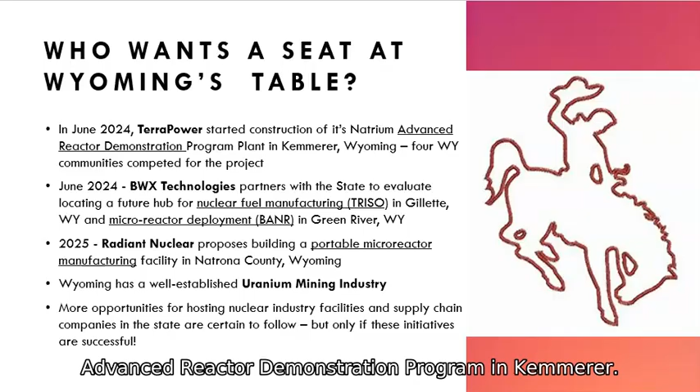But why do we have this conversation going on? Because the table is full of nuclear opportunities for the state of Wyoming. So I have a couple slides up front, just to set the stage, set the table. In 2024, TerraPower started construction of the Natrium Advanced Reactor Demonstration Program in Kemmerer. So we have a nuclear demonstration project happening now in Western Wyoming.

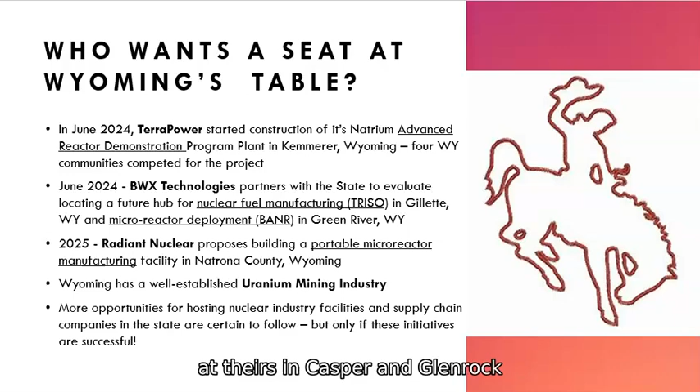Back in 2021, when that was announced, there were 4 communities competing for the opportunity to have TerraPower come to theirs, and Casper and Glenrock was one of those communities. We were competing for the opportunity to have that demonstration plant in our neighborhood because of the jobs and the economic growth.

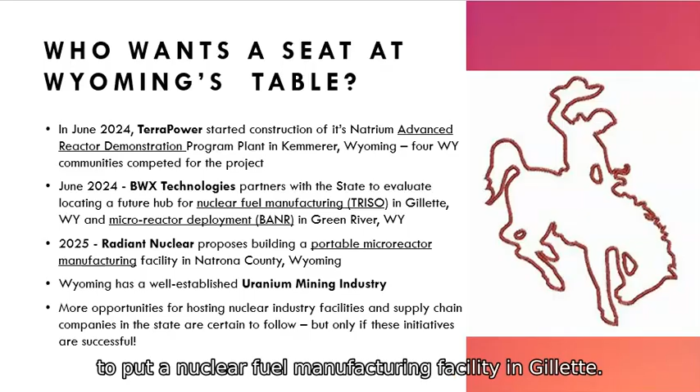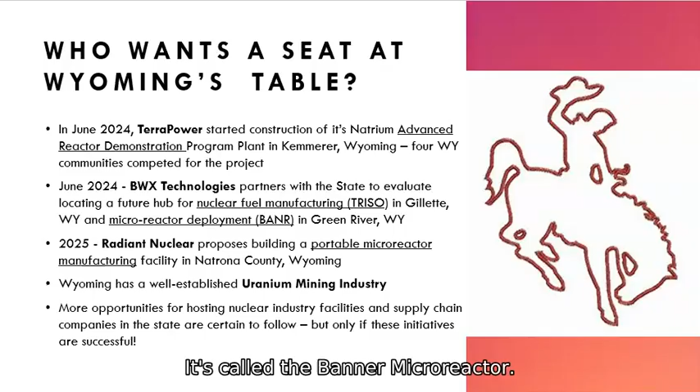I don't talk a lot about that in my presentation, but I know about it if you have questions. It's called the BANR micro reactor. It would produce about 50 megawatts of electricity, and they want to tie it in with one of the soda ash production facilities in Green River. I think that's really cool.

And in Wyoming already, we have Radiant Nuclear in our backyard talking about a portable micro reactor manufacturing facility. That's probably what has a lot of people interested. I'll disappoint because I'm not speaking directly about that throughout the presentation. I'm speaking indirectly about safety aspects of the nuclear industry. But if we want to have that dialogue, that may happen.

Already Wyoming, and the reason I'm here for the last 28 years, is that we have an established uranium mining industry, and it is growing. It is growing now, and the uranium mining industry is probably healthier than it's been in the entirety of the 28 years that I've spent in Casper. So if this goes well for the companies that are interested in coming here, we'll have more opportunities and more discussions about hosting nuclear fuel cycle type facilities in our neighborhood.

Why all the growth? Because nuclear power right now already produces about 20% of our nation's electricity. So 1 in 5 light bulbs, 1 in 5 homes is powered by nuclear in our nation, and it's been that way for many, many years, safely operating. The nuclear power generation is carbon free, and that's an attribute that I think many people are drawn to nuclear for. It's a carbon free source of electricity, and it has truly an incredible safety record in the United States.

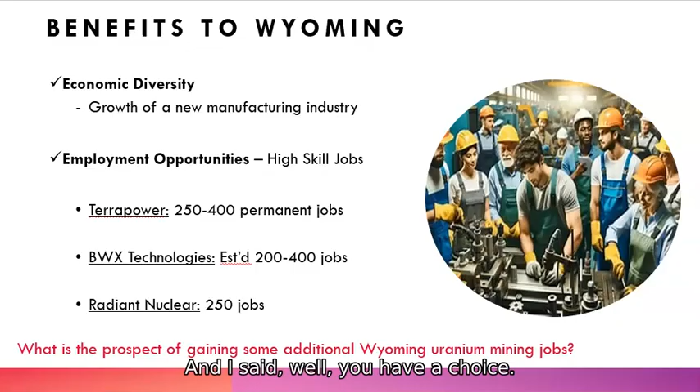All my friends, you heard I'm semi-retired, right? Which means I'll consult if you pay me enough. Otherwise, I'm content to sit on my duff and do things like this. All my friends are complaining about how hard they're working now, and I said, well, you have a choice, you could do what I did. Anyways, so it's a great time.

All that is just context. What I really wanted to do is condense some information about what I know and what I've learned in my career into something understandable. So this is the Nuclear 101 portion. Let's get some STEM education going here in this room tonight.

I want to address the questions: What is the nuclear fuel cycle? How does a nuclear power plant work? What is radiation, and how do we protect against it? And then what exactly is spent nuclear fuel, and is it safe to keep around and be around? Those are the topics I thought I'd spend a few minutes on.

Thank you for patiently sitting and listening, because I know if I speak for 30 minutes, that won't be hard for me to do, and if you ask questions, I won't be done in an hour. So we're going to try to hold questions to the end. If you have a notepad or a means of keeping your questions, we'll get to them, I promise. But this is a lot of topic, and I think we're moving along pretty well.

One slide on the nuclear fuel cycle, because really what we're talking about is attracting jobs across the nuclear fuel cycle. I've been in the state long enough.

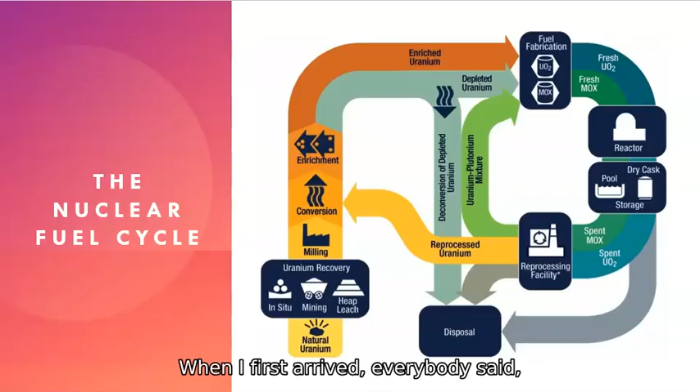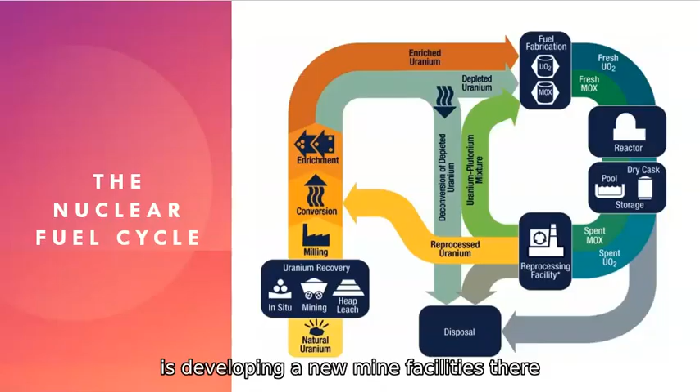When I first arrived, everybody said my mom, my dad, my grandpa, my brother worked in Shirley Basin. They said, Wayne, when are we going to get Shirley Basin back up and going, producing uranium? I'm pleased to tell you that the company that has that project now, UR Energy, is developing new mine facilities there, and they should be producing early in 2026 back in Shirley Basin for the first time in decades - at least 3 decades, because I've been here nearly 3 decades. I had a little hand in that along the way in acquiring that project and seeing it come.

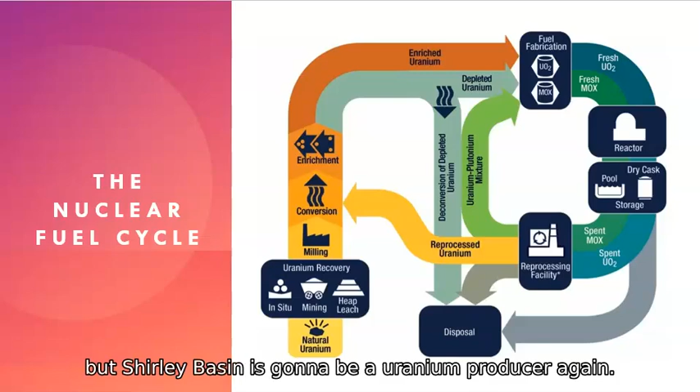But Shirley Basin is going to be a uranium producer again. This is part of the growth. It's exciting. But the nuclear fuel cycle starts with uranium mining, the production of uranium.

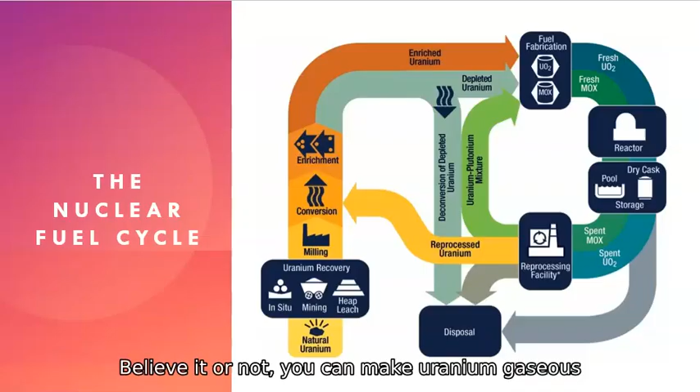Uranium is the fuel for nuclear reactors. Then we do something called conversion, which changes the uranium from a solid to a gas, a gaseous form. Believe it or not, you can make uranium gaseous as uranium hexafluoride. It's 1 uranium and 6 fluorides, and that's a gas. You can separate isotopes of uranium in a process called enrichment.

Isotopes are 2 uraniums, very similar, but with a different number of neutrons in the nucleus. So U-235 is fissionable. It's something we can split in a nuclear reactor, and U-238 is not.

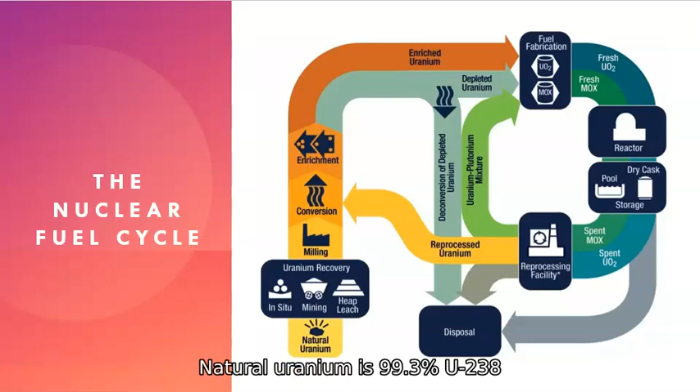Natural uranium is 99.3% U-238, which is not useful for a nuclear reactor. So 99% of what I mined in my life will go sit and be depleted, useless uranium. And the 0.7% is what we're after. We want to enrich that concentration of 0.7% for most of our reactors to 4 to 5%. And then for some of the newer reactors, we're talking about enriching up to 20%. Nuclear weapons, we enrich that isotope up to 90 to 95%. So the peaceful, commercial use of uranium doesn't have enrichment anything like what's needed for atomic weapons.

But the first 3 steps of the nuclear fuel cycle are preparing the fuel: mining, conversion and enrichment. Those are the things we're talking about. Then the enriched uranium is fabricated into fuel for the reactors. It's sent to the reactors, it's used.

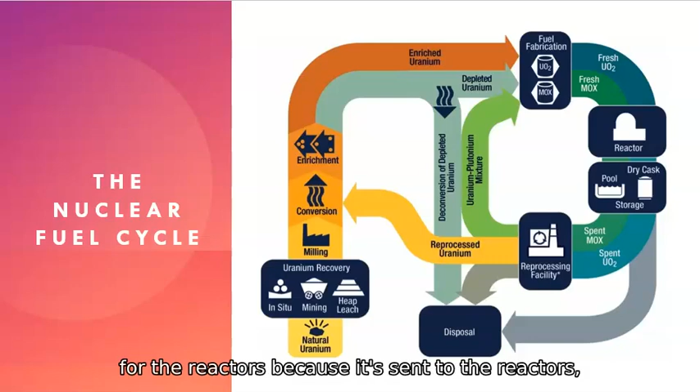Most nuclear fuel has a useful life of 18 months to 2 years when it's in the reactor. So a fuel rod, a pellet, something small, will sit in the reactor and be consumed for 18 months to 2 years before it's used up. Its potential energy has been consumed and converted into energy, and we get what we call a spent fuel rod.

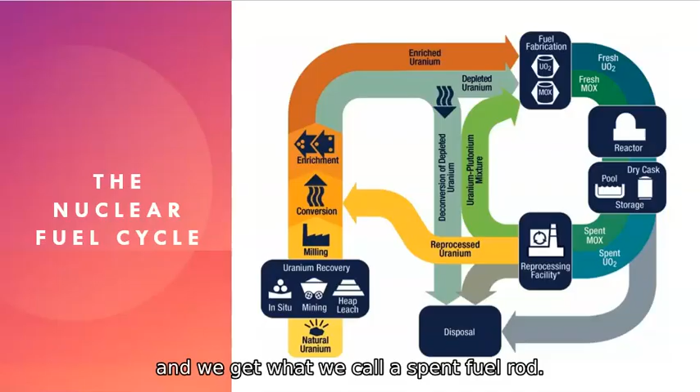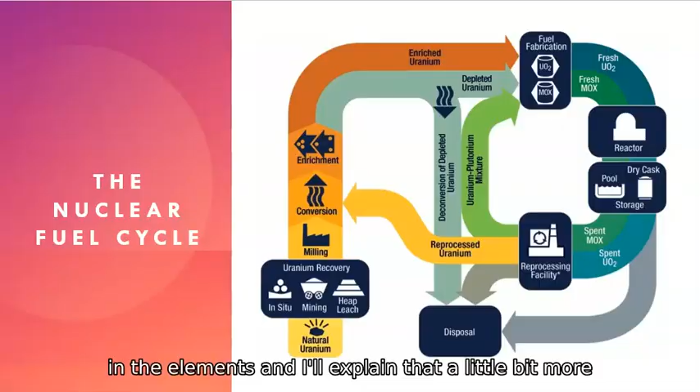Now those spent fuel rods are thermally hot and irradiated, which means they have extra neutrons in the elements - I'll explain that a bit more in the 'what is radiation' bit. But those spent fuels need to be cooled down.

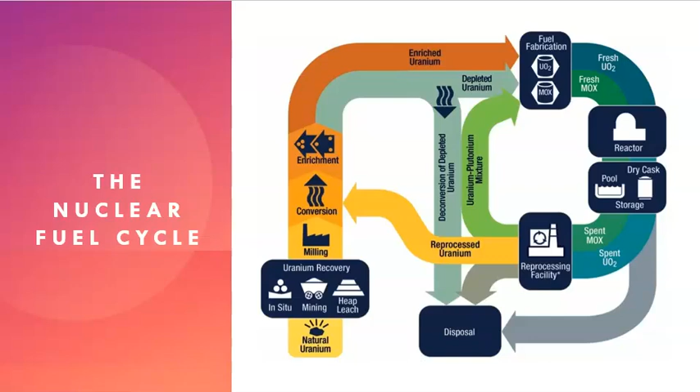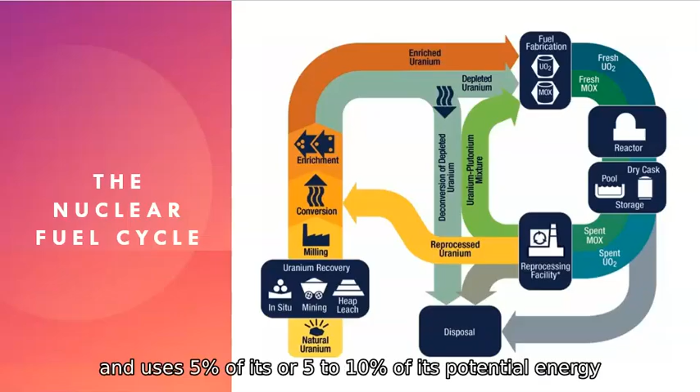And then some nations, France and others, allow those fuel rods to be reprocessed. Believe it or not, when a spent fuel rod is spent, 90% of the potential energy that could be used to do a nuclear reaction is still contained in the rod. So it runs for a year and a half or 2 years and uses only 5 to 10% of its potential energy.

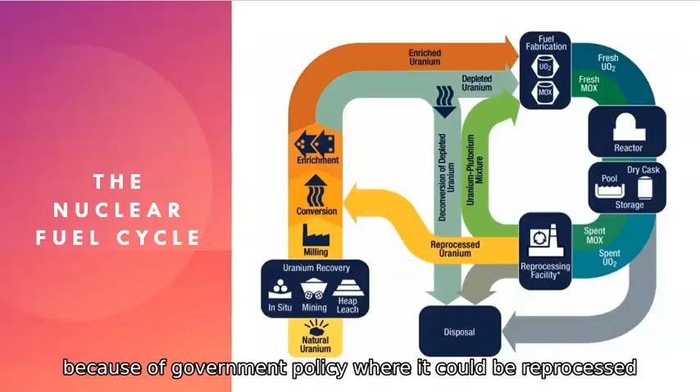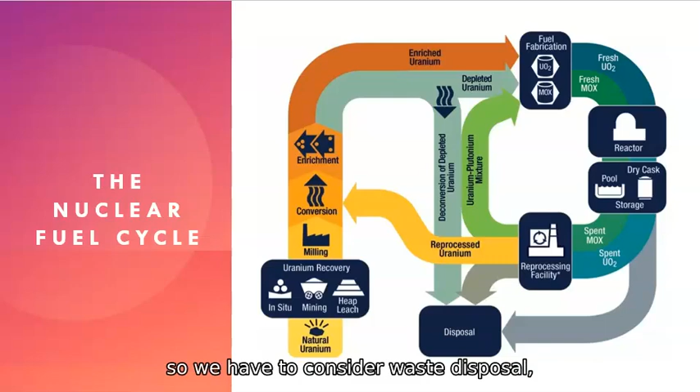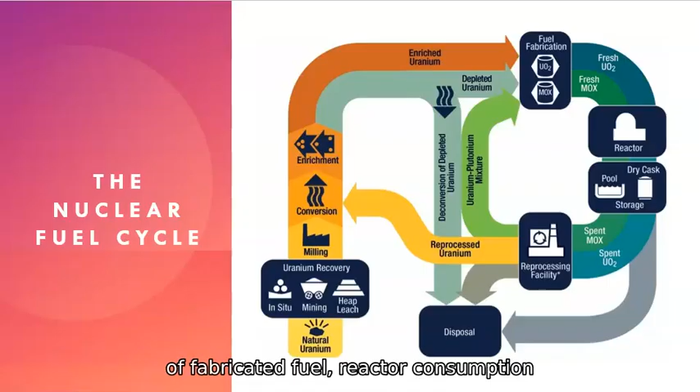And then that rod is waste in the United States because of government policy, where it could be reprocessed and we could use that 90%. Again, we could re-enrich, but we don't do that here. So we have to consider waste disposal, nuclear fuel disposal as part of the nuclear process. But all in all, this slide gives you the whole picture: fabricated fuel, reactor consumption, and then the option of either reprocessing or disposal of the spent fuel.

So how does a nuclear reactor work? What really makes this different than other forms of electricity generation? Really, in this case, it's the heat that's generated from the controlled fission, splitting of a uranium isotope 235. That heat produces steam. The steam turns a standard turbine electric generator. Steam turbines are used in wood, coal, natural gas, and diesel-fired electric power plants. No different - it's just the source of heat. We're not burning something, we're splitting an atom and getting heat from splitting atoms.

So this shows you an atom of uranium 235 getting split. What happens is a neutron, a free neutron, which is a high energy particle, hits that atom. It adds one neutron into the nucleus of the uranium atom, and it becomes very unstable with an extra neutron in there. And it splits into a krypton and a barium atom, and it also throws off a lot of heat. And then it throws off 3 more neutrons. So 1 neutron goes in and 3 neutrons come out.

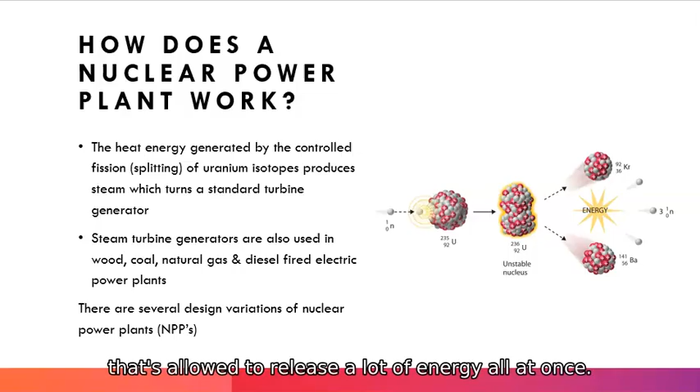So this is a boiling water reactor. This is the typical reactor that's been built in commercial power plants. A couple of things you want to know: water is used as a heat exchange media.

On the far left, the far left you see a containment building with a dome. The nuclear reactor's inside of that. Water is pumped into that reactor and takes on the heat. The water becomes steam, the steam goes out of the reactor building, turns a turbine, which generates electricity, and which goes to our cities and communities.

And then that water, that steam, is condensed and cooled again. There's a cooling tower, and it's returned back into the reactor. This was the original design of boiling water reactor. But the key feature is water is heated to steam, and steam exits the containment structure and turns a turbine to generate electricity. If you were burning coal, you would generate heat by burning coal, and that would heat water, which would make steam, which would turn a turbine, which would generate electricity.

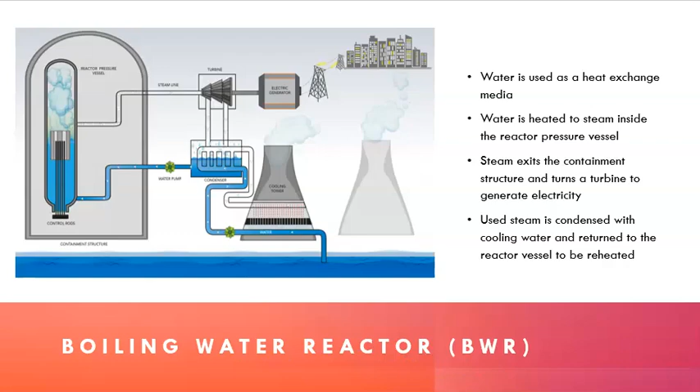Not much different, really. Let's boil it down to the nuts - they're not much different, except the source of the heat.

And this is my pet peeve, this is something that I just absolutely abhor. The image that you see here is not a nuclear power plant. For those of you who get this, these are cooling towers. These are structures that are used to cool steam, and they generate steam - that's water vapor being emitted, clean steam being emitted from a cooling tower. And the reason I said this, we always see these towers and we think nuclear - that ain't it. These cooling towers are common to many thermal electric generating facilities, not just nuclear. Every time I see a picture of a nuclear power plant and it's just a couple of these cooling towers, I say, oh come on, let's do some science, right?

So the next generation of nuclear power plant became safer, because what they did was they put a loop of superheated water and kept it inside the containment vessel. Because hot steam needs high pressure pipes, and you're transmitting through pipes, and a steam leak where the steam was in contact with the nuclear reaction could carry radionuclides out. So what they did, they got smarter.

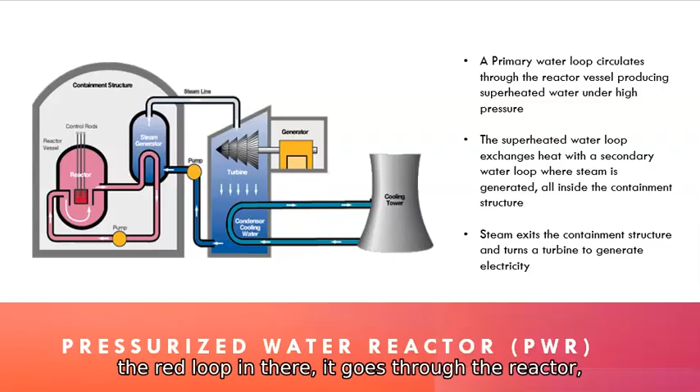They heated up the water into super high pressure hot water and kept it as water. They have a separate loop, the red loop, that goes through the reactor and gets heated up. And then they have a second heat exchanger, which generates steam. So in this case you have a water loop, a primary hot water loop, and then a steam loop. The steam loop gives you that steam that turns the generator, which generates electricity, and then you cool the steam and send cool water back in. But there's a level of separation between the nuclear reactor and the water that exits the reactor containment building, and that adds an additional safety feature to reactors.

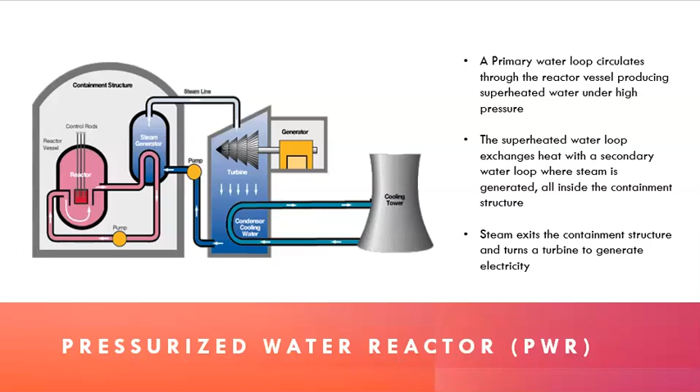Now we're talking about the TerraPower type of reactor. This is molten sodium, or sodium cooled. Rather than using water to cool, we use a hot metal - in this case molten sodium - replacing the water as our heat exchange media. The advantage is that molten sodium has the heat capacity to contain 6 times as much heat as steam. Steam just gets super energetic and wants to expand as fast as it can. You could put 6 times more heat into molten sodium than you can into hot water, so the heat capacity is incredible.

So they have a hot primary sodium loop that exchanges heat to a secondary sodium loop, and hot secondary sodium leaves the reactor containment vessel and goes to a heat exchanger, where that hot sodium heats up water, makes steam, turns a generator, makes electricity. Sounds familiar? This is getting repetitive, isn't it? But these are different models of nuclear reactors, and evidence that as we went through our learning curve with nuclear, we got safer and safer designs.

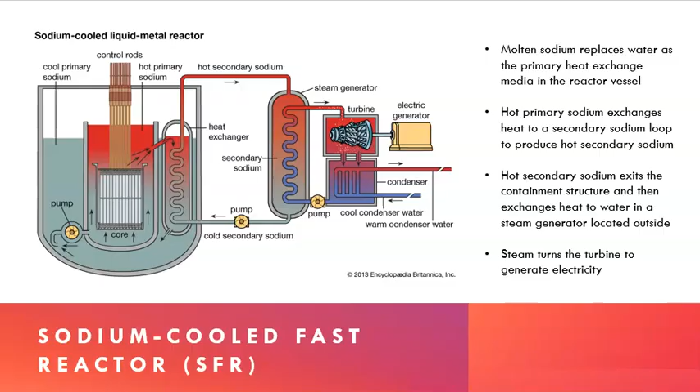They want to produce up to 345 megawatts in a small modular reactor design, also known as a sodium fast reactor. The neat thing is they can store heat in hot sodium tanks, so they don't have to go straight from generating heat in the nuclear reactor to turning turbines. They can store it and follow the demand. It's got load following.

So they have these hot sodium tanks which exchange heat to water, and the electric generation island is actually a separate building. It's not a nuclear facility at all. You're just getting hot steam going across to a turbine.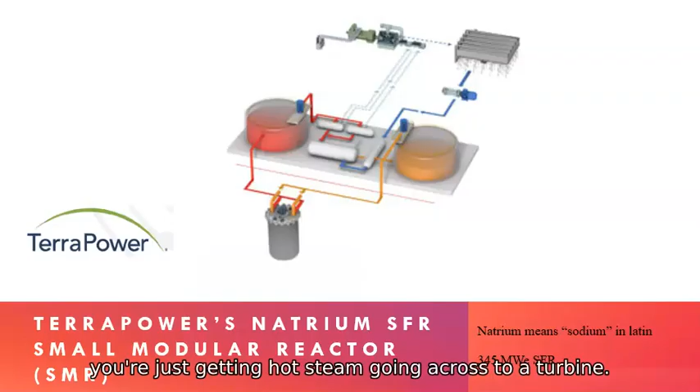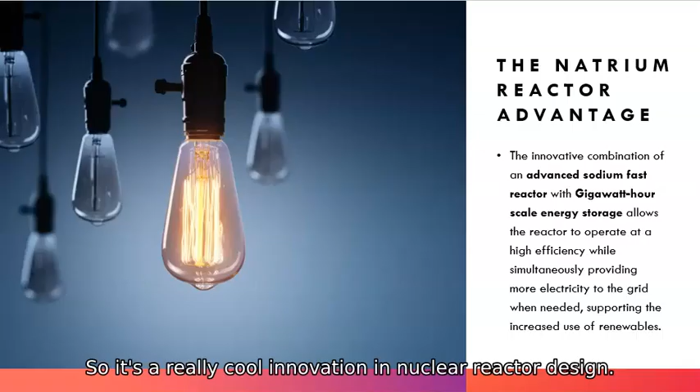And again, the advantage of this innovative design is you're going to get gigawatt-hour scale energy storage. You can store over a gigawatt of energy, which is about what Casper uses in a day. It operates at high efficiencies and can follow loads. It's a really cool innovation in nuclear reactor design.

And then there's Radiant. Radiant reactor, it's a microreactor. They want to produce 1 megawatt reactors, one. TerraPower is 345. The BANR reactor, which BWXT wants to do, is about 50. So there's all these different models, and a standard reactor is about 1,000 to 1,200 megawatts, 1,000 megawatts being a gigawatt.

Anyways, the fuel is tested and proven. It's called TRISO fuel, and that's actually what BWXT wants to manufacture in Gillette. They want to use the TRISO fuel for manufacture of the microreactor here. That's a ceramic coated particle. It actually has shielding inherent in the fuel pellet, and it's meltdown proof.

It's been proven that you cannot heat it up enough to melt it down. That's an innovation in and of itself, so it's an inherently safer design. Helium gas is used rather than sodium or water as the heat transfer.

And when you get this, you'll really get it. Helium cannot be irradiated. Irradiated means it takes on a neutron into its nucleus, and helium, being an extremely small atom or element, cannot take on another neutron in its nucleus. So if helium gas was released to the environment, it would be non-radioactive.

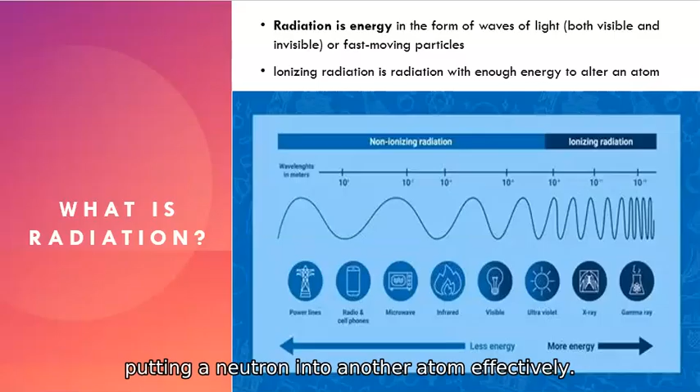And those are the ones you see across the top of this chart. If you can read it, you have non-ionizing radiation and ionizing radiation. What does that mean? Ionizing radiation is radiation that has enough energy to alter another atom, and that's the damage that can be done. So it's the X-rays and gamma rays we're concerned about for ionizing, putting a neutron into another atom effectively.

We are swimming in a sea of radiation every day, whether you know it or not. And that's one of the things that creates fear for radiation: we can't see it, we can't smell it, we can't sense it when we're being exposed to it. That's hard, that's a hard thing to overcome.

But I'm about to get on an airplane in the morning. I'm getting out of town. You know why? Because I'm here tonight, right?

And I took a chance.

Every time you get on an airplane, you're getting less shielding from the atmosphere, and you get a lot more cosmic radiation, radiation from the sun. That's natural. You also get radiation from the soil and dirt—there's a lot of radioactive elements in low concentrations in dirt. You get radiation from the food you eat, bananas and such. 9% of the radiation you take in a typical year is from food sources like bananas and irradiated milk, things we do to keep germs from killing us. We use radiation to do that, and it's very effective.

One of the big sources of radiation exposure is radon gas. Radon gas is short-lived, and when you're exposed to it and inhale it, it can decay in your lungs and do damage to your lung tissues. Another source is medical.

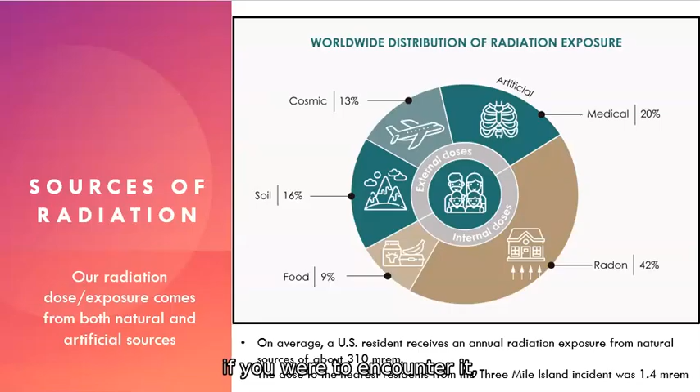So let's talk about the different types of radiation. You hear about alpha particles—that's a large, heavy particle with a little bit of energy. It's electrically charged, essentially a helium nucleus, with 4 neutrons and 2 protons, giving it a +2 electric charge. It can be completely blocked or shielded by a sheet of paper, your skin, your clothes—pretty much anything that alpha particle encounters will shield it from you.

The risk for alpha radiation is really inhalation. Radon gas, when it breaks down or decomposes in your lungs, gives you alpha radiation directly to your lung tissues, and prolonged exposure can cause damage.

Helium's mass—it has 2 protons, 2 electrons, and 4 neutrons. That would give it an atomic mass of 6. Yeah, I think that's what it is, or check the periodic table. I looked that up before I put it on the slide.

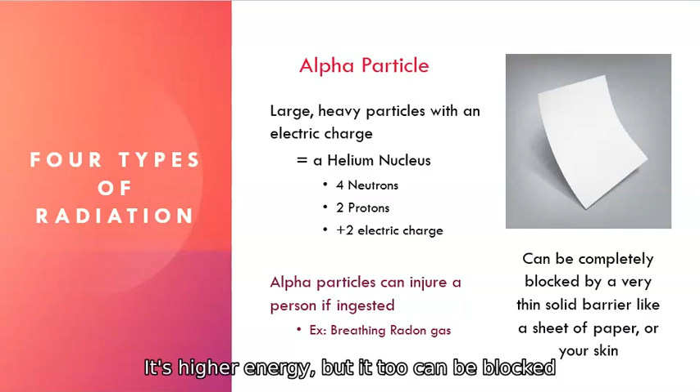A beta particle is faster, with a single electric charge. It's essentially 1 electron, higher energy, but it too can be blocked by simple shielding like a piece of aluminum foil or your clothing. Beta particles can also injure you if ingested, but are unlikely to do much injury if just exposed in nature.

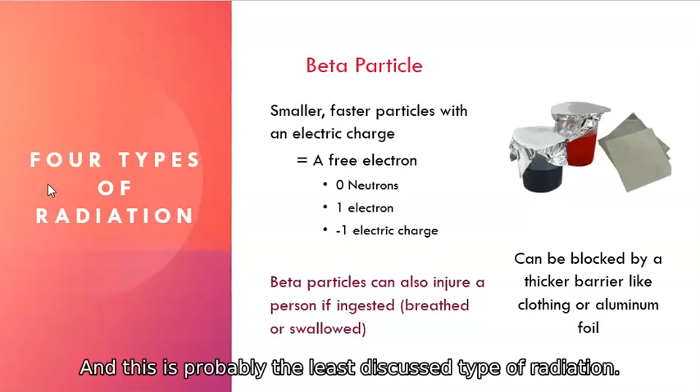This is probably the least discussed type of radiation. Next we're talking about wave-like rather than particle types of radiation. Gamma and X-rays are high energy waves of light at much shorter wavelengths than the human eye can see, and some at longer wavelengths. X-rays and gamma rays can travel greater distances and penetrate the shielding that blocks alpha and beta radiation, but they can be blocked by a heavier shield, like lead or steel.

So when you get an X-ray, like a dental X-ray, what do they do? They throw this heavy vest on top of your chest, right? That's a lead shield to protect you from additional radiation.

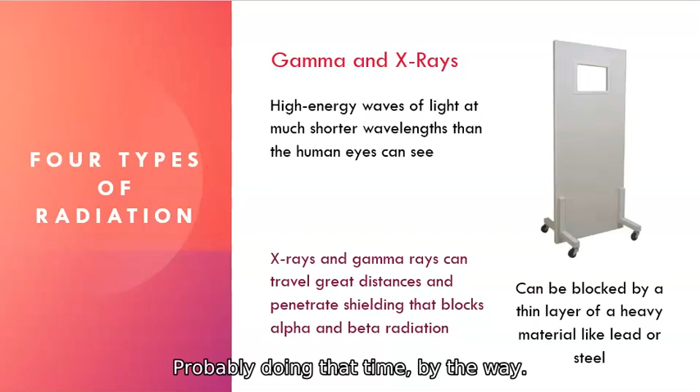How are we doing on time, by the way? It's 6:42. Holy moly, we're almost done. Four types of radiation.

The last type of radiation is neutron radiation. It's a high energy neutron particle with no electric charge. This type of radiation is the type that can make other objects or elements unstable, and it rarely occurs outside of a nuclear reactor. It can be blocked by thick steel or thick concrete.

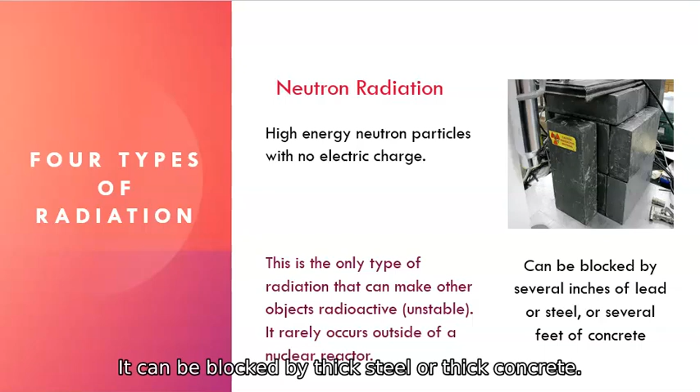This is probably one of the more interesting things. How do we protect against radiation? I've been explaining the types already. Look, the lady here is putting sunblock on - that's shielding. She put a hat on - that's shielding. If you're out in the sun too long, what do you do? Get out of the sun - that's time. If you're close to something energetic or radioactive, you get away from it - that's distance. So time, distance, and shielding are the three principles of radiation safety.

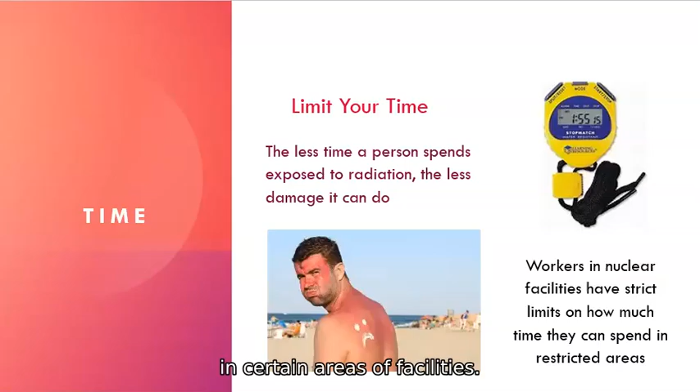Limit your time exposed to the sun. The less time a person spends exposed to radiation, the less damage it can do. That's a fundamental scientific principle. Nuclear workers, radiation workers, have strict limits on how much time they can spend in certain areas of facilities, and that's monitored, understood, and science-based.

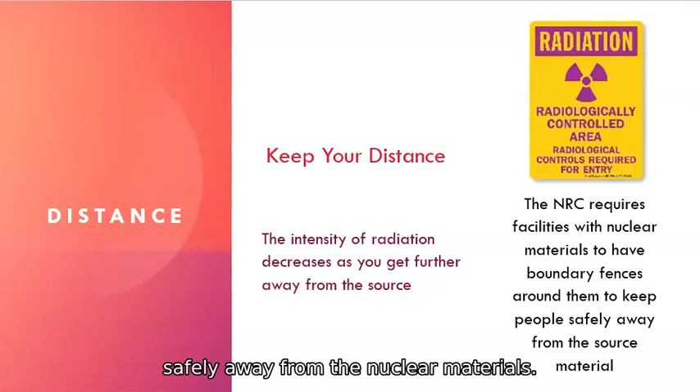Keep your distance - that's the other principle. The intensity of radiation decreases as you get further away from the source. You ever sit at a campfire? Did you ever step away from it? Same principle - the further away you get, the less heat, the less everything you'll feel. It works the same with radiation as with heat from a fire. The Nuclear Regulatory Commission requires facilities with nuclear materials, including uranium mines, to have boundary fences and barriers to keep the public safely away from the source. Those fences are calculated, the distances are known, to keep the public safely away from nuclear materials. It's the principle of distance.

The final one is use protective shielding. Different layers of shielding can block all types of radiation. When you know what type of radiation you're dealing with - if it's spent nuclear fuel, irradiated, nucleated materials - you're going to use thick shielding. If it's the sun, you put on UV40 or UV30 sunscreen, depending on how much sun exposure you want, and you'll put on a shirt or get out of the sun. Time, distance, and shielding - those are the principles of protection.

Finally, last topic: what is spent nuclear fuel? You've seen these pools, like at the Fukushima disaster - I'll call that a disaster. What happened was the electricity that pumped water to the spent fuel tanks failed. They had three levels of electricity. When the reactor runs, they got electricity from the reactor. When the tsunami struck, they had shut down the reactors and got electricity from the grid, but the tsunami took out the grid. Then they had emergency generators to power the pumps, but the generators were located too low and the tsunami flooded them, taking out that third level of design.

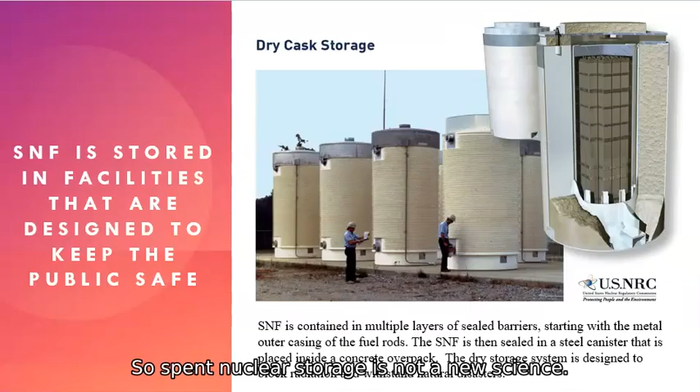So spent nuclear storage is not a new science. This is something we've been doing since the early 1970s or late 1960s. Spent nuclear fuel is contained in casks, built in multiple layers of sealed barriers, starting with a metal outer shielding, and then wrapped in a concrete overpack. They're dry storage systems, there's no liquid inside, and it's designed to block radiation and withstand natural disasters. These are well engineered, and in the history of spent nuclear storage, we simply don't have incidents happening. There is no incident to point to about the unsafe storage of spent nuclear fuel in dry casks.

It can be transportation casks or storage casks, but the record for safety on spent nuclear fuel is incredible. So just a couple of facts before I wrap up. The nuclear industry follows strict rules to stop radioactive material from escaping into the environment, no matter what point in the nuclear fuel cycle you are. Common applications: spent nuclear fuel is stored at close to 75 sites in more than 30 different United States right now, in dry casks.

So we're talking about whether or not we want to do that. We'd be joining a long list. Volumes: the U.S. has about 95,000 metric tons of spent nuclear fuel today. And when our current commercial fleet of reactors, close to 100, has outlived their reactor life, then we have about twice that much, about 180,000 metric tons. That's really not very much when you consider that a ton of coal has the equivalent of one little pellet. How much coal and coal ash do we create?

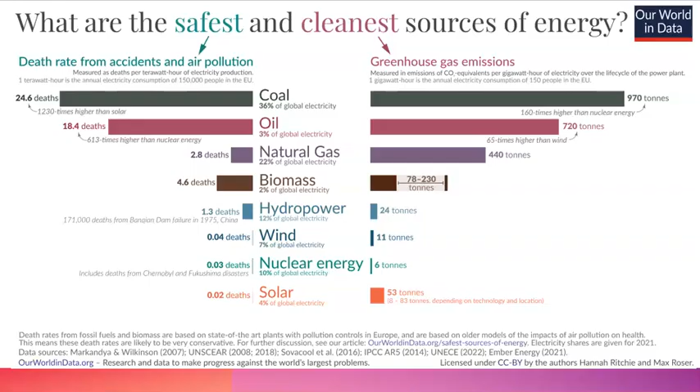Yeah, good question. Do you see these gentlemen working on the outside of those casks? Do you see their shielding? Yeah, you do - it's the cask. That cask is designed to block that radiation. The most aggressive neutron radiation is blocked by steel or lead and 3 feet of concrete. These gentlemen are walking outside of the dry casks, monitoring any incidental radiation and recording it safely, or they wouldn't be done right outside the cask.

A bit off topic - what is your thoughts on President Trump's executive orders, this new design that fast tracks, sounds like, bypassing the Nuclear Regulatory Commission, at least in funding? What are your thoughts?

No, I don't think he wants to bypass any safety features. I hope not. I hope what he's saying is we can man up and do these faster. I know there were months when I thought nothing ever happened, but I got billed for time when I was licensing a uranium mine - again, the front end of the nuclear fuel cycle, no enrichment, no conversion, no fuel, just uranium. Everything that we had to study, we had to prove, and it would take months, and then suddenly they turn around with 5 questions and said, it took you 5 months to come up with 5 questions on my technical report. It took me forever to get the data and assessments on. I think what the president would like to do is fast track licensing, because we have an urgent need, if we acknowledge it, for more electricity. One of the stories out there is that the data centers proposed for the state of Wyoming are going to consume more electricity than all the households in the state of Wyoming - all of them. And I think that's an accepted fact.

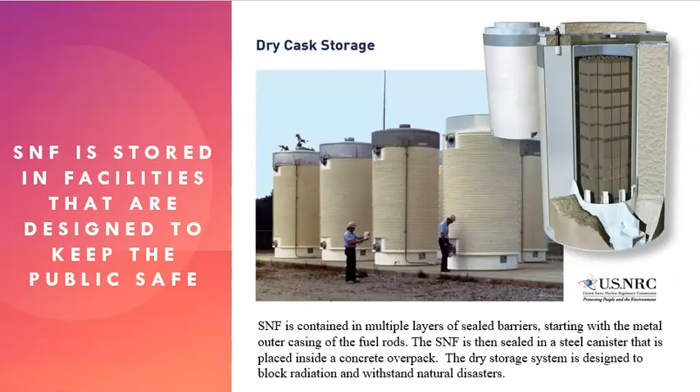Hi Nicole - anyway, you mentioned that in Europe they reprocess their spent nuclear fuel. What kind of opportunities could we have for that here if the US changes policy? And for the spent nuclear fuel that's been stored long term, is there an ability to go back and retrieve it for reprocessing?

Reprocessing is something that is known how to do, and they do it in Europe and France. They treat the nuclear fuel and get the value back out of it. 90% of the uranium in that fuel rod is not consumed during the 18-month life cycle of the nuclear fuel rod. So it seems crazy that we put something in, use it for 18 months, and it's only 10% consumed while 90% is waste. Could we reprocess if we wanted to? Sure, we're going to need people with the knowledge and a willingness to do it. But reprocessing of spent nuclear fuel is a low priority pet peeve of mine.

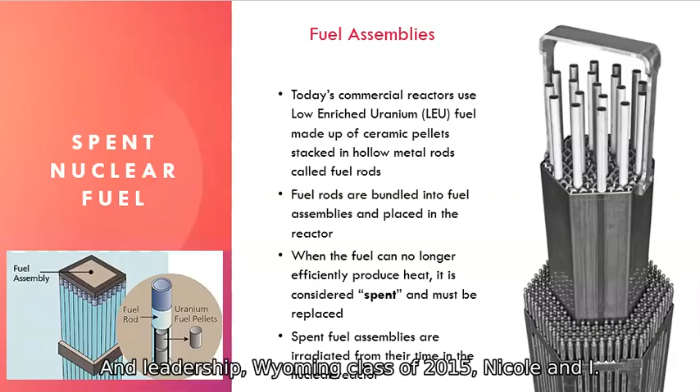Leadership Wyoming class of 2015, Nicole and I. All right, yes sir, I want to thank you.

I'm really excited because I've seen things I've taught for 45 years, and that's the point I have. We need to tell our kids, I don't care whether it's hard or not, you take chemistry, physics.

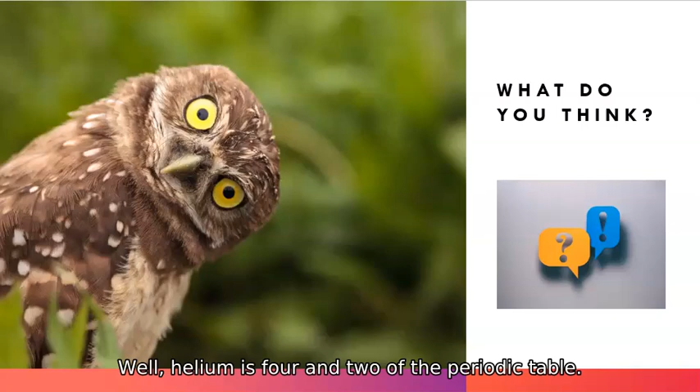Yes, and math. But I'm still a little confused. You said uranium-238 and 235 had different numbers of protons. It's different numbers of neutrons. 92 is the atomic number, that's the number of protons. Helium-6, I'm still concerned. You said helium couldn't be made into an isotope. Well, helium is 4 and 2 of the periodic table, meaning 2 neutrons, 2 protons. Well, I'm confused, I want to find out if there's a helium-6. It's the new math.

Thank you, thank you for the science lesson, there's a lot I had to digest for this. Tell your kids and grandkids to take chemistry and physics, then they too can be metallurgical engineers with mineral processing.

Thanks very much. You had a couple of pictures there of the portable reactors and the micro reactors, can you give me an idea of scale? How big are these things? Well, the microreactor that Radiant wants to build can be truck transported down the road. That's the intention—they want it to be the size and scale that you could pull it with a semi tractor down the road.

Microreactors. So the Point Beach nuclear power plant, which I happen to know the most about, has 2 reactors, 900 megawatts each, and they occupy a site about 70 acres. The entire property of Point Beach, which sits on Lake Michigan in a deep water area, is about 1,200 acres. Last time I went back there, they littered that 1,200 acres with solar panels. They're co-producing solar and nuclear right into the grid at the same spot because they needed that buffer zone for their property, so they're using it to generate solar power.

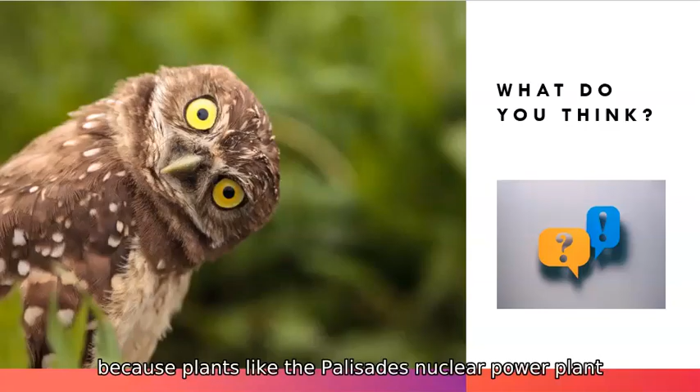Set that against the fact that there's 90 to 100 operating nuclear reactors. And that's a very dynamic number right now because plants like the Palisades nuclear power plant on the Michigan side of Lake Michigan, across the lake from where I grew up, Palisades is being reactivated. It was retired and they're reactivating it. And a number of nuclear reactors, 3 Mile Island is coming back to life.

We actually have an increasing number of plants that, because of retirements, are being unretired. God, don't tell me that. I'm retired.

Anyways, so we would typically consume about 50 million pounds of uranium in the United States. So even if the mines and the licensed capacity we have today was fully operating, 25 or 30 million pounds in the US, we're still reliant on imports of uranium. We're reliant on imports of conversion and enrichment. We have a conversion facility. We have a company that's expressed interest in building a new conversion facility for the first time in my career. And we have enrichment in the United States, but it's foreign owned. So a couple of years ago...

Right. Well, we have low grade uranium deposits, so there's a higher cost, but the market's good right now. It is good, and that's why they're ramping up production.

What countries would we rely on for the extra material? Canada is one of the world's biggest producers. Kazakhstan, which is in the sphere of Soviet or Russian influence, is the world's biggest producer and exporter. We have African nations, Australia - a number of friendly nations we can rely on. I think our fuel supply, our source of uranium from friendly nations, is secure and sufficient.

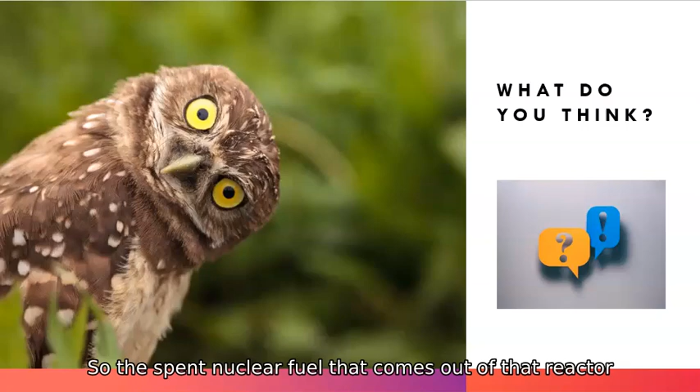That's cool. But after 5 years, that reactor is going to be turned off, cooled, and shipped back to the factory, refueled, and sent back out into the field. The spent nuclear fuel that comes out of that reactor - they said the size of the fuel is about the size of a propane tank you'd use with a gas grill or fire pit. So the volume of spent fuel we're getting back after 5 years from any given reactor is very, very small. It's going to get stuck in a dry storage cask and shielded from the public. I'd imagine they don't need much of a footprint for that storage facility, but it will be studied to death by the NRC and others before they have the right to do that. They can't just do it because they say they want to - they've got to get permission, and that's a hard process.

It's building, yeah, correct. And then the spent fuel will come back and be kept here until the U.S. government gets its act together and establishes a consolidated spent fuel storage site in the United States - one over here.

So I kind of feel that this conversation has been tilted in favor. Do you have anything negative to say, like about the subsidies, or that the infrastructure is going to make our electricity rates go up? I don't think that having a manufacturing facility in our community, and just because it's generating nuclear power, is going to impact our cost of electricity. That's not power going into our grid - that's our local grid, and it's not power going to our utility that supplies us electricity. I think it's a complete misunderstanding of how things work to suggest our electricity rates are going to go up because a manufacturing plant is built in our community.